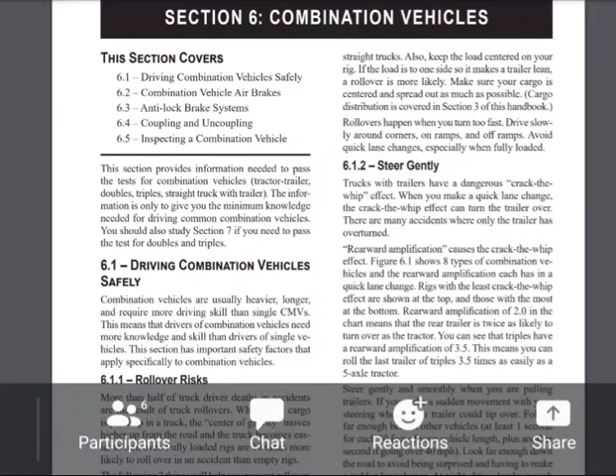I got a question. I'm surprised that they'll allow a crack in your brake drum as much as half of your friction surface. I was reading that you can have a crack in your brake drum on the friction surface, as much as half of the friction surface across the friction surface.

That makes sense? Yeah, I know that the pad lining on the liner can be no less than 1/4 inch thick before they consider it out of service. But I was taking some practice tests - you talking about the crack in the drum itself, the drum, right?

Yeah, I don't know actually how long they allow it, but it has to be there because I got jacked before. I got pulled over 4 years ago on a scale. They did a full level 1 inspection on me, and that's one of the things he dinged me on. They put on their little jumpsuits, lay on their little roller thing, roll up under your truck and trailer, and start checking all your stuff. He said I had a crack in my drum. He didn't give me a ticket for it, he gave me a 30-day fix-it ticket.

So if you don't get it fixed in 30 days, it turns into a citation. But if you get it fixed and submit it back, go to a DOT scale and let them re-inspect it, then you won't get a ticket. So we were able to do it that way, but they will write you up.

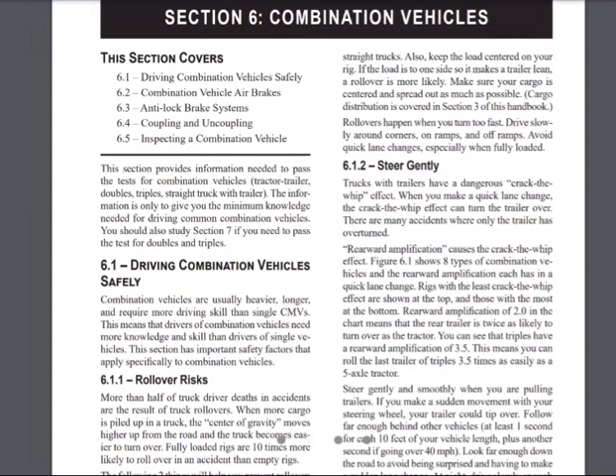Combination is one of the three tests you got to take at the DMV to complete your learner's permit - general knowledge, air brake, and combination. Combinations use anywhere from 15 to 25 questions. It's brief, kind of like air brakes was yesterday, so it won't be long. It'll be about the same time we spent yesterday on air brakes, but we just got to do those quiz questions at the end of this session. So combinations - remember, I'm only going over the things that are relevant to the permit test as it relates to combination.

Hold on. All right, here we go.

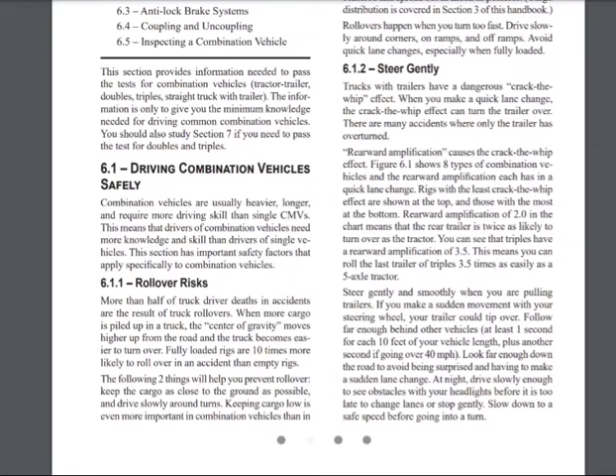So one of the things we talked about the other day at General Knowledge is one of the main reasons that causes truck drivers' deaths and accidents: rollover risk. More than half of truck drivers' deaths and accidents are a result of truck rollovers. So rollovers take out more drivers than anything.

There's two things they suggest we should do to prevent it. The second paragraph says the following two things will help you prevent a rollover. First, keep your cargo as close to the ground as possible. So when you go pick up freight, make sure whoever loaded that trailer didn't double stack pallets on top of each other and make you top heavy. You want to keep your freight as low to the ground as possible.

And the second thing is driving slow around turns. You want to take turns and curves nice and slow, because remember, trucks are 13 feet 6 inches high. If you take a curve or corner too fast, and that truck is top heavy and gets off balance, it's going to roll over. Trust me, it's going to roll. Especially if they get enough tilt that the freight shifts to one side in the trailer, then it's really gonna flip over.

Once that trailer is rolling, you being connected to it by the fifth wheel, the truck is going to pull you over too and roll you over with it. So you got to be careful that you take turns and corners nice and slow, and that when you pick up trailers, that freight is kept low to the ground.

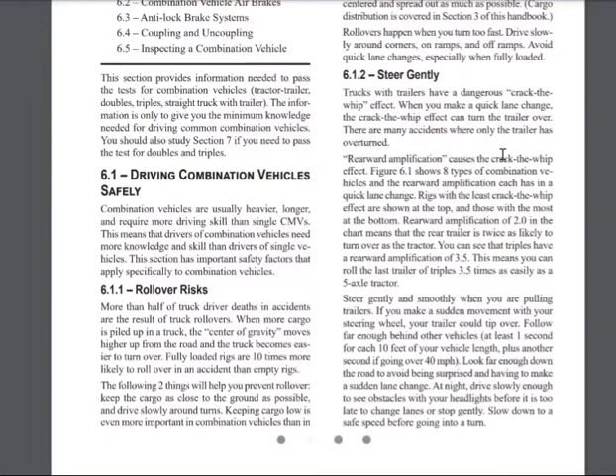If you look at this diagram here, pay attention. There's a lot of trucks on here, but look at the very one at the bottom with the three trailers behind it. Those type of setups are at the highest risk of rollover, because the more trailers you have and the longer you are, the more at risk you are for rear amplification.

That's why we always put the lightest trailer at the very end, and the heaviest trailer right behind our truck. Imagine if you put the lightest trailer there instead, and the heaviest at the end, and rear amplification kicks in - that could be very dangerous, it's going to snap it loose, because it's so heavy. You can put a lot of freight in these trailers, and they can be extremely heavy, especially if you're hauling heavy stuff like bottled water, canned goods, things like that.

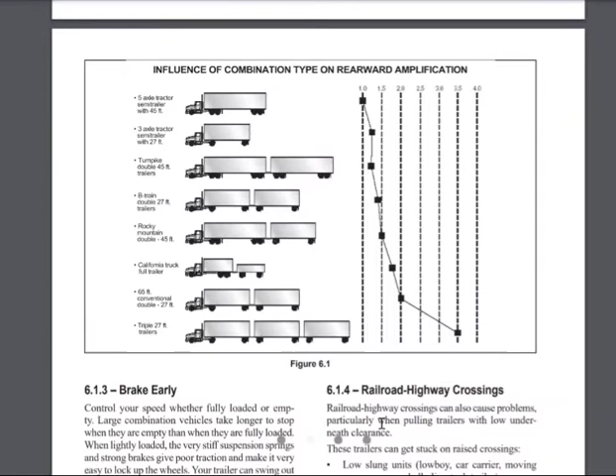We talked about this a little bit on Monday when we did general knowledge - railroad tracks and how low ground clearance trailers can get stuck on them. When you're dealing with combinations, you're talking about towing the vehicle, so they talk about that type of stuff here too on combination. A lot of general knowledge stuff coincides with this, like yesterday with air brakes, and tonight with combination. Some trailers that could get stuck on raised railroad tracks are low slung units like low boys, car carrying trailers, moving van trailers, possum belly or livestock trailers. You got to be careful running over those tracks because you can get stuck.

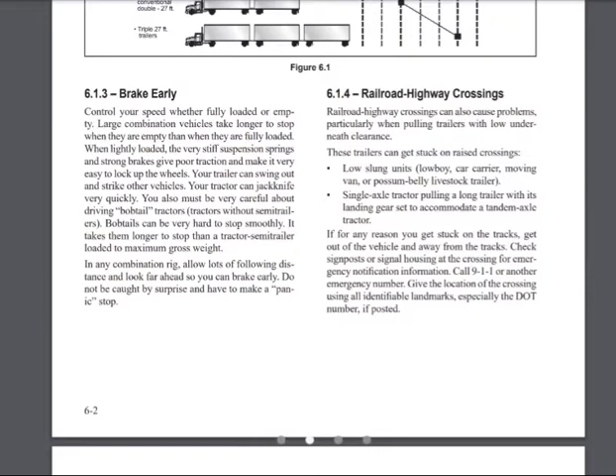If you do get stuck on the tracks, you need to call 911 as soon as possible, outside the truck, so they can get a hold of that train yard and that conductor to bring the train to a stop before it gets to you. Any questions? All right, let's keep going.

Whatever happened - it could have been a brake line came loose, or numerous other things - it made the trailer brakes lock up. And when they locked up, they began to skid to the left. This is called a jackknife because that trailer is involuntarily sliding around, coming around on the left side of the truck. You never want to slam on the brakes in a situation like that because you're going to make that trailer swing around even faster.

What you want to do is get off the throttle, get off the brake, and counter steer. You chase that trailer with the steering wheel - you counter steer against it, until you get back control of that trailer.

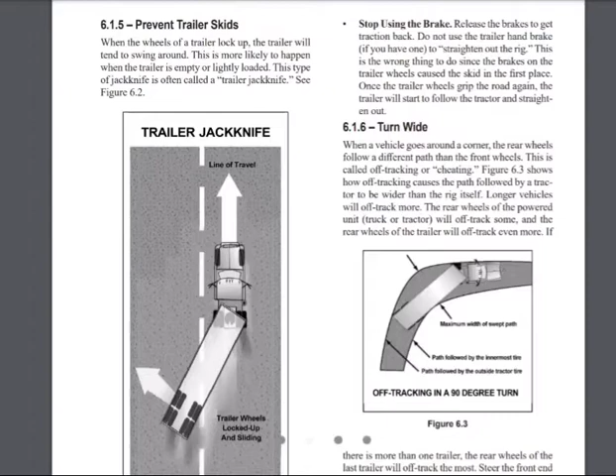We saw this diagram on Monday when we talked about right-hand turns. Remember, we said the jug handle is illegal for this truck to swing over into the oncoming traffic lane to make his right turn. They need to continue straight until they get to the second lane, stay in the second lane until the trailer clears the curb. Once the trailer tires clear the curb, he can move all the way over to the right lane and keep going to his destination. It's called a button hook - jug handles are illegal, button hooks is what they want us to do.

When you connect to a trailer by the fifth wheel, the way you control the trailer to make it go where you want is you always have to turn the steering wheel in the opposite direction you want the trailer to go. So if I want that trailer to go to the right side of my truck, I'm going to turn my steering wheel to the left. If I want that trailer to go to the left side of my truck, I'm going to turn that steering wheel to the right. You always turn the steering wheel the opposite way you want the trailer to go.

You're going to learn more about that when you go in the yard and we start teaching y'all how to do skills: straight line, offset, parallel, alley dock. That's when you're really going to have to learn this concept.

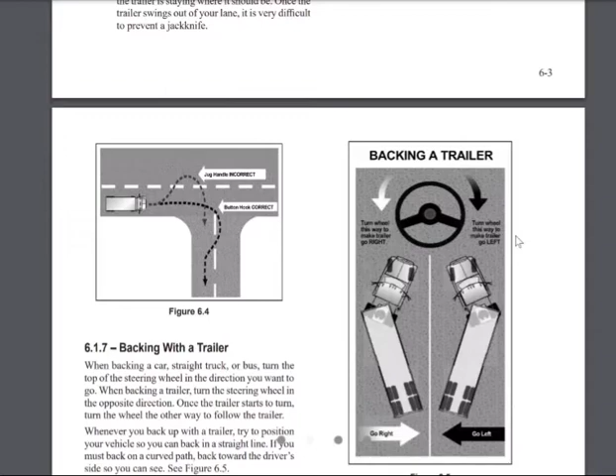Let's see if y'all been listening. What two things are important to prevent a rollover? Driving slow on curves. All right, the two things that are important to prevent a rollover are keeping the freight low to the ground and going slow around turns. Remember, keeping the freight low to the ground and going slow around turns.

Number two, when you turn suddenly while pulling doubles, which trailer is most likely to turn over? The last one. That is correct, the very last trailer.

Number three, why should you not use the trailer handbrake to straighten out a jackknife? Now, I might have to help you with that one because they always ask you this question before they tell you what a trailer handbrake is. We're going to talk about the trailer handbrake on the next page, but yet they're asking you about it now, and I never understood that. But nevertheless, the trailer handbrake is a valve on your dash.

Yesterday, remember we were talking about air brakes and how you need air to get to your brakes so your wheels can turn. If you stop the air from going to your brakes, then the spring brake system is going to automatically kick in and lock your brakes. So this trailer hand valve is a valve on your dash that you can pull up or down. If you pull it down, you cut off the air from going to your trailer, which locks your trailer brakes.

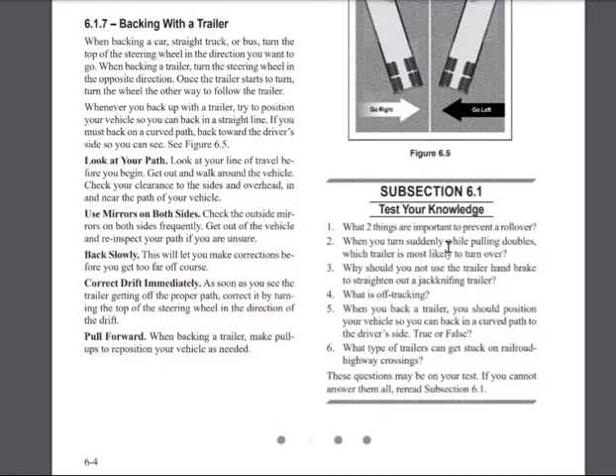Number 6, what type of trailers can get stuck on railroad highway crossings? Lowboy trailers is one. Car hauler is one. So any trailer with low ground clearance, pretty much.

All right, trailer hand valve. Low ground clearance? Can you repeat that one more time? Any trailer with low ground clearance. Low ground clearance. Yep. All right, thank you.

So this is that trailer hand valve I just told y'all about. It's only for testing trailer brakes on a new trailer. And what it does, it locks that trailer, cuts off the air supply to the trailer so the trailer brakes come on. That's the trailer hand valve.

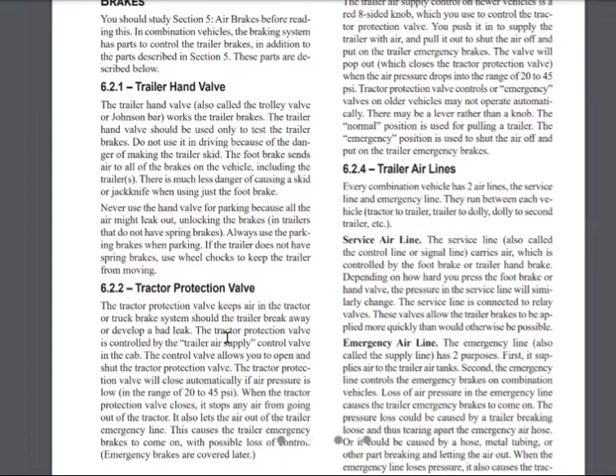The tractor protection valve. What is the tractor protection valve? It keeps the air in the tractor or the truck brake system should the trailer ever break away. So if your trailer lines ever snap or come loose from your truck while you're towing that trailer, it protects your tractor air. That's why it's called the tractor protection valve, because it protects the air in the tractor if the trailer breaks bad on you.

All right, if you look up here, trailer air supply control. Pretty much if you read this backwards, it's going to tell you what it's doing. Trailer air supply control, it controls the supply of air to the trailer. That's the little red octagon thing we talked about yesterday in air brakes. It's on your dash, it's red, shaped like a stop sign, octagon shape. If you push it in, you supply air to your trailer. If you pull it out, you stop the air supply to your trailer. So that is called the trailer air supply control.

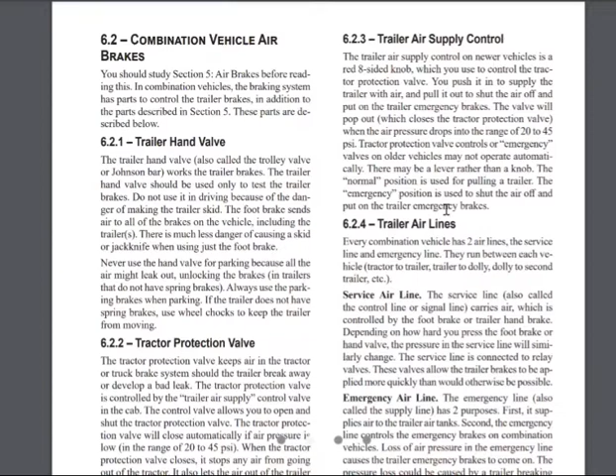All right, trailer airlines. So if you get out of your truck and walk toward the back, you're going to see a blue and a red airline. The blue one is your service airline and the red one is the emergency airline. You connect the two lines from your tractor to your trailer and they got to be color coordinated. You put the blue line on your trailer, you take the red line from your truck and connect it to the red line on the trailer.

So let's talk about what each one is for. The blue service airline, that's the blue one. We connect the blue service line because the service airline works in conjunction with the service brake, that's the brake on the floor that you smash with your foot. Every time you smash that brake with your foot to slow down, the same amount of pressure applied to your truck gets transferred through that blue airline to your trailer, so your trailer brakes work in harmony with your tractor brakes. So the trailer and the truck work together to slow down when you smash the service brake. That's what that service line is for.

That red emergency airline is your main air supply. It's like electrical work, the red wire is the hot wire. You touch it, you're going to get shocked, right? The red emergency line is your main air supply to your trailer. That's the main one filling up your air tanks in your trailer, giving you that 120 to 140 PSI pounds of pressure to release your brakes so your trailer's wheels can turn.

All right, so if I'm driving down the road and that blue service line pops loose, I probably wouldn't even know it, I'd probably keep driving down the road. But if this red emergency line popped loose while I was driving, I'm going to know it instantly, because I'm going to look in my mirrors and see smoke coming out of my trailer tires since I'm dragging them down the highway, they ain't turning no more because I've locked my trailer brakes. My tractor wheels are still turning, but my trailer wheels ain't turning no more. I'm dragging them down the road because my red emergency line came loose. So this is your main air supply to your trailer.

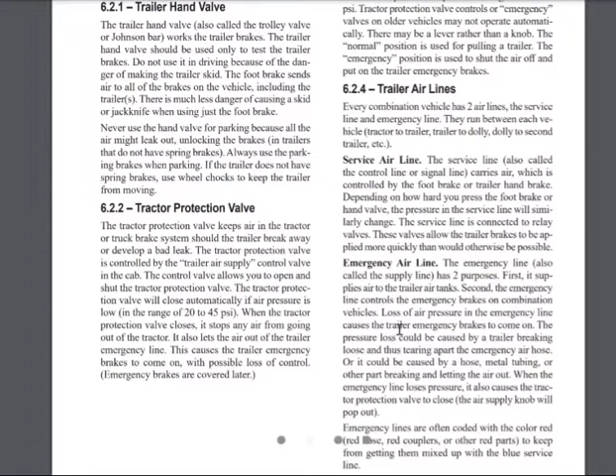This is what's keeping the brakes from locking up on you. If something happened to this red line, you're jacked up. This blue line, you could be okay—you could smash your brakes, your truck could be slowing you down, but you wouldn't be getting any help from your trailer because the trailer brakes wouldn't be working, only your tractor, because the service line came loose. You probably wouldn't even know if this one came loose, but you'll know instantly if that red one came loose. Everybody understand what each line does? Yes. All right.

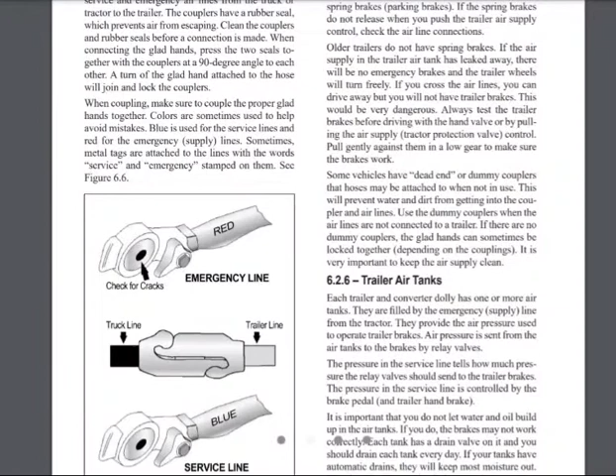So we connect them by hose couplers. At the end of those hoses they've got little metal things—we call them glad hands, but the proper name is hose couplers. They're metal, and these metal pieces have round rubber grommets in them. So you connect the one from your truck to the one on your trailer by the glad hands, and the air goes through that dark circle hole around the grommet. Air pressure goes into that and through the line. All right, so these are your glad hands.

They have to have a snug fit, and this rubber grommet has to be in place. If this rubber grommet is missing and you connect them anyway, when you push your red air line in to supply air to your trailer, you're going to hear a constant hissing sound like shh. You'll get out of your truck, walk up there, and you'll feel air shooting out of this crack. Because this rubber grommet is missing, all your air pressure is going to be coming out these cracks, and you won't get enough air pressure to release your brakes. So now you're stuck with that trailer.

So as truck drivers, we used to keep an extra bag of these in our truck, because sometimes you'll go pick up a trailer and truck drivers steal these, because they'll be missing them—they take them out of empty trailers just sitting on the yard. Then you go pick that trailer up and now the rubber grommet is missing. So you keep some of these in your truck and you'll never have that problem. Just pop one in, hook your lines up, and go on about your business. Everybody got that? Yep. I gave y'all that for free. All right.

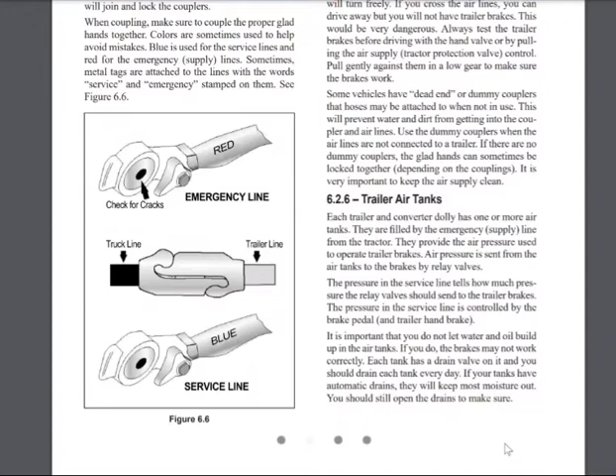Shutoff valve. Remember we talked about multiple trailers, doubles and triples? We call those little trailers pup trailers because they're small, 20-footers, 28-footers, 30-footers. At the back of each one of those pup trailers is a shutoff valve, at the rear of each trailer. What are they there for? Those shutoff valves allow air to flow from one trailer to the next trailer.

So if I hook a trailer up behind another trailer, I'll open up the shutoff valve so the air from the trailer I already have will flow to the new trailer I just hooked up to. I'll keep opening the valves for as many trailers as I hook up. But the very last trailer, that's the shutoff valve I'm going to close, because if I leave it open I'm just going to be blowing air into the atmosphere, wasting it. So you close the shutoff valve on the very last trailer, and leave all the other valves open so air can flow through to each trailer. You've got to remember your air compressor is way up there on your engine, so the air is being pumped from your truck engine all the way through as many trailers as you have connected behind you. But the very last trailer, you close.

All right, let's see if y'all are listening. Why should you not use the trailer hand valve while driving? Remember I said it has one purpose—testing only. Yes, it's only for testing trailer brakes. That is correct. Number two: describe what the trailer air supply control does.

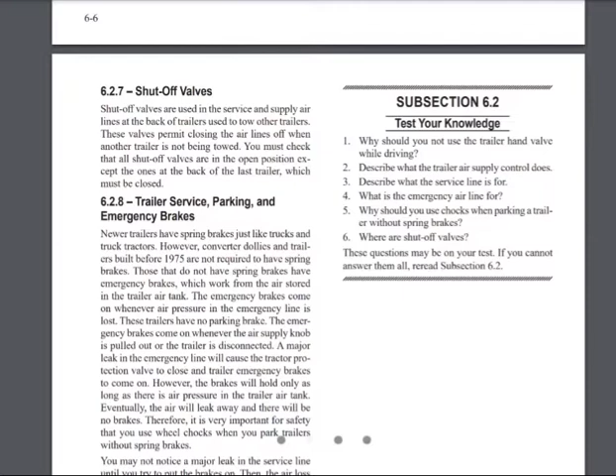One more, number 6, what are shutoff valves? You can actually cheat, hell it is right there. Shutoff valves, what are shutoff valves? It's the valve that releases air to the trailers. Yeah, yep, it's the valve that allows air to flow from trailer to trailer. That is correct, all right, let's keep going.

This is more about anti-lock brakes again. So everything we talked about anti-lock brakes and general knowledge on Monday, it's the same thing. March 1st, 1997, it was created to prevent front-end skids. ABS stands for anti-lock braking system.

Do I still have normal brakes if they stop working? Yes, I do. How do I know I got ABS? A light will come on my dash when I turn the ignition.

So the only thing they're talking about here in combination is just the last statement I just made. How do I know I got ABS in my truck? ABS light will come on the dash when I turn the ignition on.

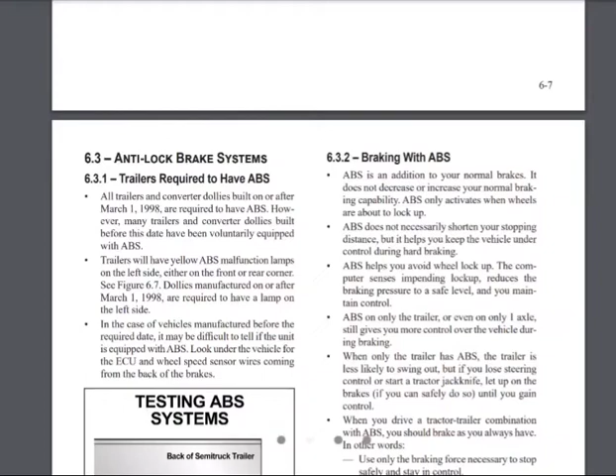But when that ABS light comes on, flashes on my dash, that trailer I'm hooked up to, if that trailer has ABS, it's going to have an ABS light too, but it's going to be at the rear left. Remember that location, the rear left. Any trailer with an ABS system on it is going to have an ABS light at the rear left of that trailer, and it's going to flash when the ABS light flashes on your dash. It should be flashing on your trailer as well if your lines are hooked up.

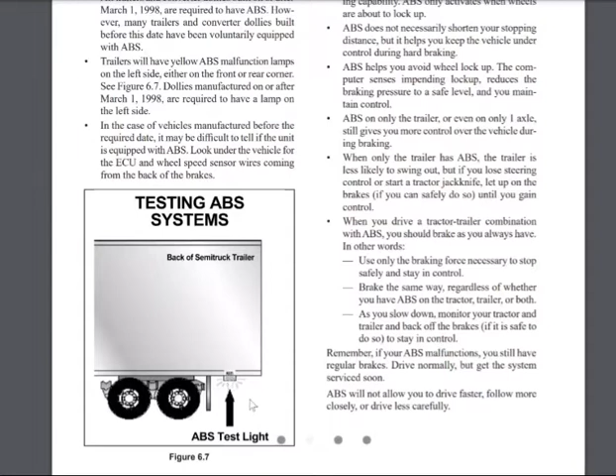All right, everybody got that? The rear left, remember the location.

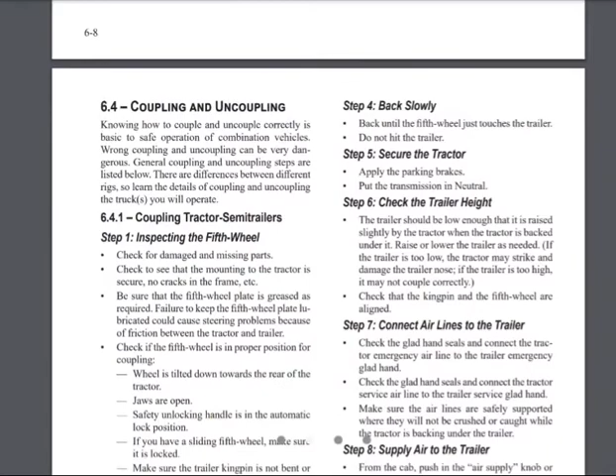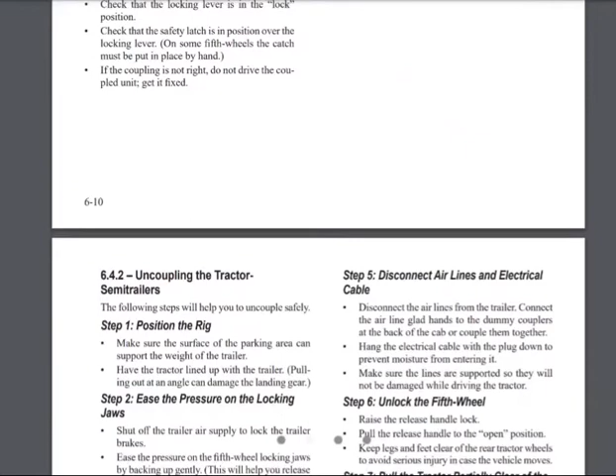All right, this is talking about coupling and uncoupling. You're not gonna have any questions on your permit test pretty much about that. Only thing you need to know about coupling and uncoupling on the permit test is how do you line up to couple to a trailer, and the answer is directly in front of it. You line your truck up directly in front of that trailer before you back up under it.

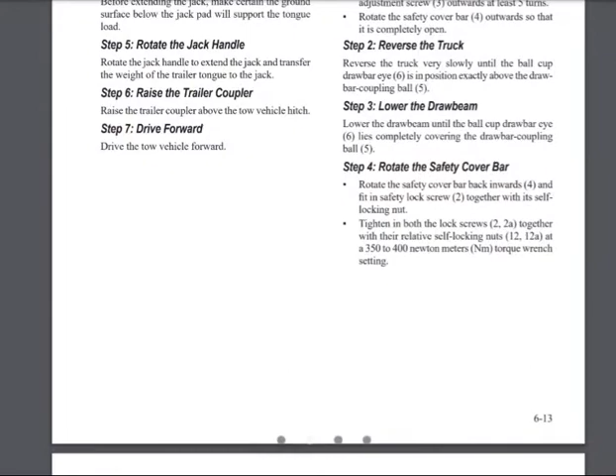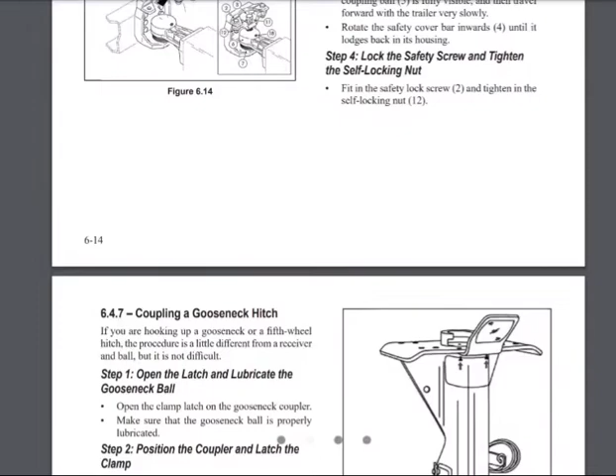All right, pintle hooks, this covers everything pretty much from people hauling RVs, boats, all that. Is that what they use when you're hauling doubles? We use the dolly with a pintle hook. What is that called? We got a name for that doggone trailer. I'm trying to think on it. I think this might be on here. Not a gooseneck, it is. Let me go back.

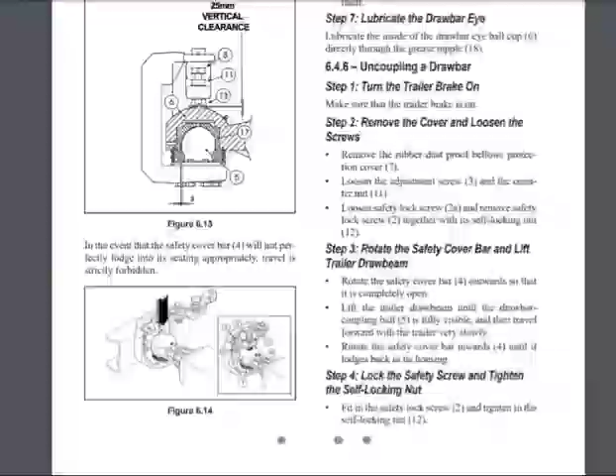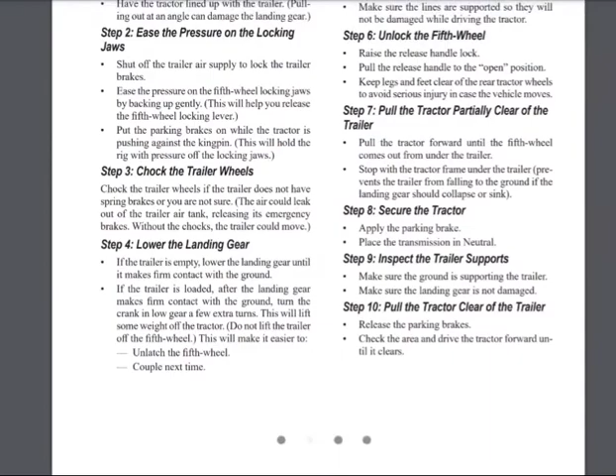The kingpin that I'm gonna show you a picture of next, a kingpin acts like your finger. It pulls that trigger. Once it pushes this in, when you back up under that trailer, what you don't see is a chunk of steel in this fifth wheel that looks like the capital letter C. And when you push it in, it swings around and locks around the shank of the kingpin.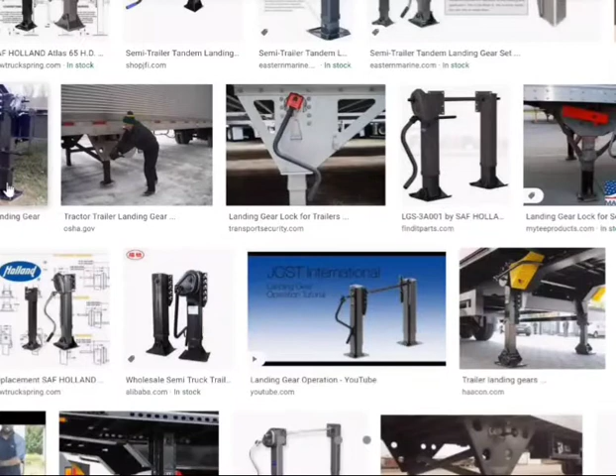All right, let me show you right here. This is a good picture right here. This is a trailer and the landing gear. These landing gear are the legs that support the front of the trailer when the truck is not under it. This supports the weight of that trailer when a truck is not under it.

Once you back your truck up under there and lock to it, and that locking jaw is around the shank of the kingpin I told you about, and then we just talked about the blue line and the red line emerges. I hook up all my lines and everything's connected. This is the last thing I do. I start, like you see this guy right here doing, turning this cranking arm, raising these legs up. Because now the front of that trailer is resting on my truck fifth wheel, so I can tow it now.

When I'm done with this trailer and I disconnect, I let these legs down all the way down to the ground. Then I pull off from up under that trailer and leave it there. But these landing gear legs need to be raised all the way up to the top.

A lot of truck drivers get lazy and just want to raise it up a little bit, like how you see on this picture right here. The sand shoes at the bottom of this landing gear are not that far from the ground. So if he just did it like that, he'd be able to move it from that spot.

But say he pulls out of that driveway and there's a dip in that driveway, then these legs are going to get caught in that dip and he's going to bend them or probably break them. And if he bends them and breaks them, now how's he going to drop that trailer when he gets to where it's going? So now he's stuck under that trailer. You've got to wait for somebody to come fix these legs. So you don't want to do that to yourself.

So raise these, take the little extra time and keep turning this cranking arm until you raise the legs. And another thing, the federal government says that we have to put these - you see this cranking arm right here? This is a hook right here. This arm should be resting on this hook. They don't want us to let it just hang like that.

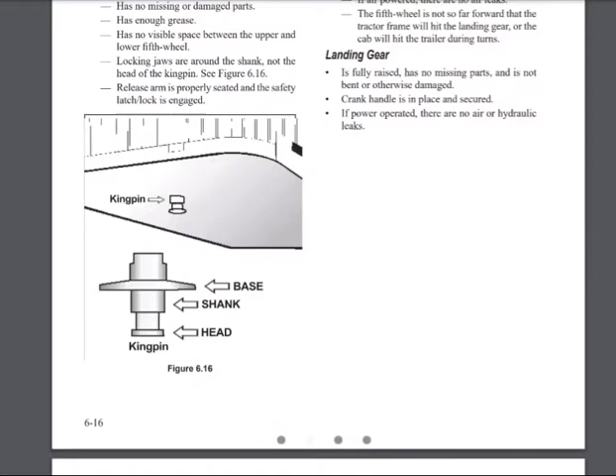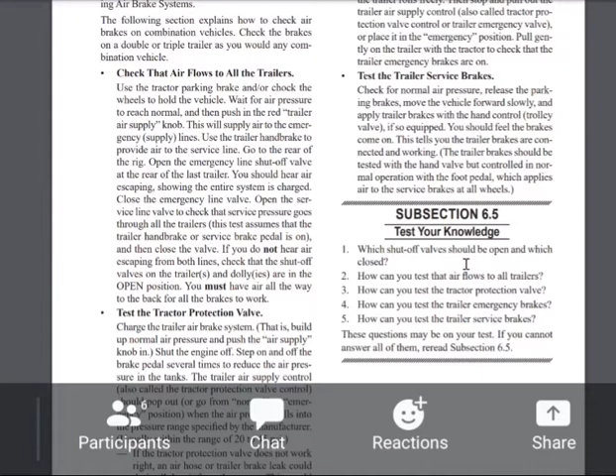Which shutoff valve should be open and which one should be closed? Anybody remember? Yes.

All right, hold on, responding to this message. Back and open that door. All right, so...

The very last one, you're right. I was distracted, guys, sorry. Yeah, the very last one, yeah, that's correct.

Number 2, how can you test that air flows to all trailers? So how do I know air is flowing through all of my trailers?

Well, if you open up the shutoff valve on the very last trailer and air is blowing through it, then you know it's blowing through all the other trailers, right? If your trailer rolls, you got air. That's another way to know too. If you open up the shutoff valve on the very last trailer and you feel air blowing, then you know that it's blowing through all the other trailers because the compressor's way on the truck.

How can you test the tractor protection valve? First, you got to remember what the tractor protection valve is for, in the tractor. So if I want to see if that's working, then what do I got to do? I got to disconnect what? From your trailer, that's right. You disconnect the coupling system from your trailer, because remember the tractor protection valve is designed to protect the air in the tractor if the trailer breaks loose. So you got to disconnect the trailer to see if the tractor protection valve air lines work.

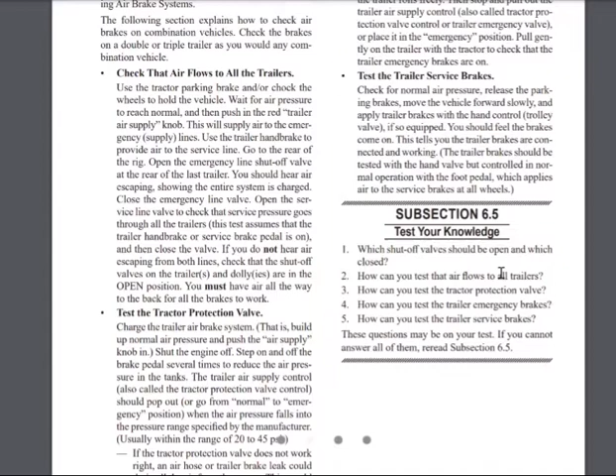How can you test the trailer service brakes? Step on the brake pedal. Yeah, but you got to idle first. So roll forward about 5 miles an hour, smash the service brake like you said. And if the truck and trailer stops in a straight line, you know that the brakes are working fine. And you're going to actually have to do that at the DMV in front of your examiner. You have to make your truck roll 5 miles an hour and then smash the service brake, and they want to see that truck and trailer stop in a straight line. Everybody got that? All right, let's move on.